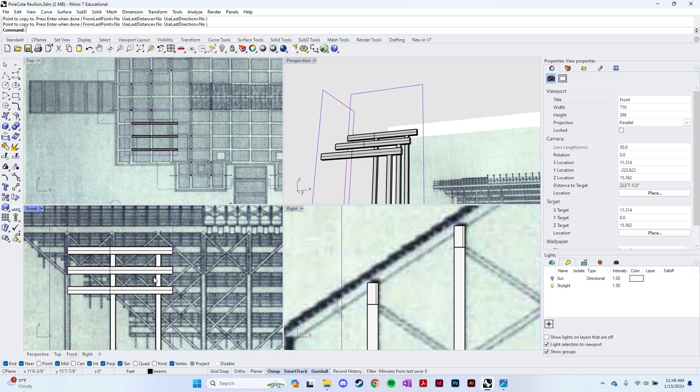Now that we have our beams and columns done, we can start working on the smaller members of our model. One of the members I see is this piece of wood on top of the beams, so we're going to add that in.

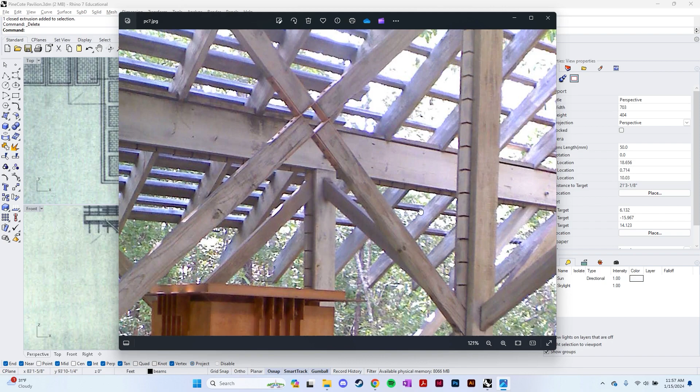Because we don't have any actual measurements, we're going to have to do our best to guess what the member size is. I'll guess that the member size is a nominal 2x8, which would be 7.25 inches by 1.5 inches. After I draw my rectangle on the right view, I'm going to use snapping to grab the midpoint and line it up with the midpoint of the column.

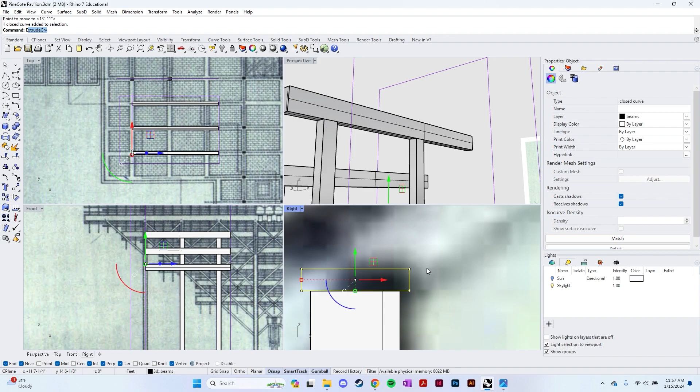Then use the extrude curve command and pull this piece of wood all the way across my beam. We'll take a look at this photo again and see if the sizing looks about right, and it looks okay, so I'm just going to copy this piece of wood to all of the other beams.

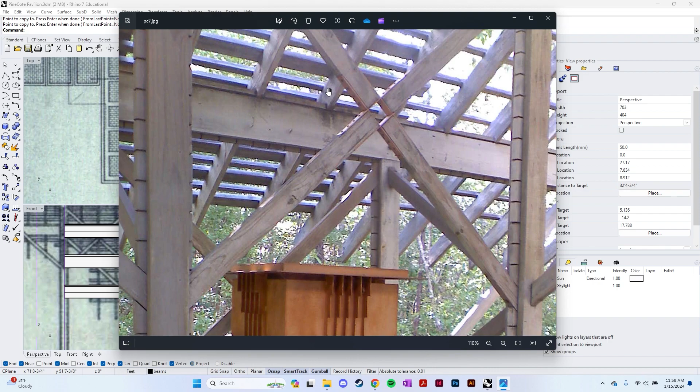Now we can take a look at the rafters. When we zoom into the rafters, we see that they're actually notched, so they're not really sitting exactly on top of the beams, but they're cut so they have a little indent that lets them sit snugly in. When we make our rafters, we're actually going to include that cut.

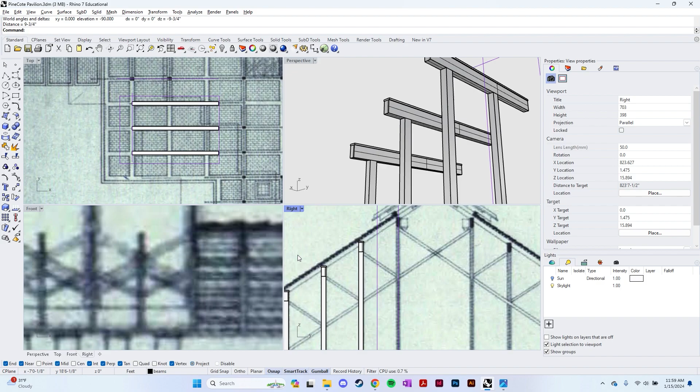So to start, we need to get the dimensions of our rafters, and it's really fuzzy in these drawings, but we'll do our best to make an educated guess. I'm going to guess that the rafters are nominal 2x10, which would be 9.25 inches by 1.5 inches.

Now, because the rafters are at an angle, it might actually be easier for us to construct the rafter somewhere on the ground and then rotate it into place. So I'm just going to draw here in perspective on the C-plane, and then take my rafter curve and extrude it to some arbitrary length up.

Now we can try to rotate this piece. In perspective view, I'm going to grab the piece, and using the gumball, I'm going to try to rotate it - let's say 45 degrees. Maybe that's what it looks like.

And when we do this rotation, we see that 45 degrees isn't really accurate if we look at a right view of our section. So we might need to rotate this piece using commands rather than a gumball.

To start, I'm going to measure the angle between the horizontal ground and the slope of the roof, using the angle command for that. I'm going to start by drawing just a tiny line, and use the bottom piece of the line as my reference point for the angle command.

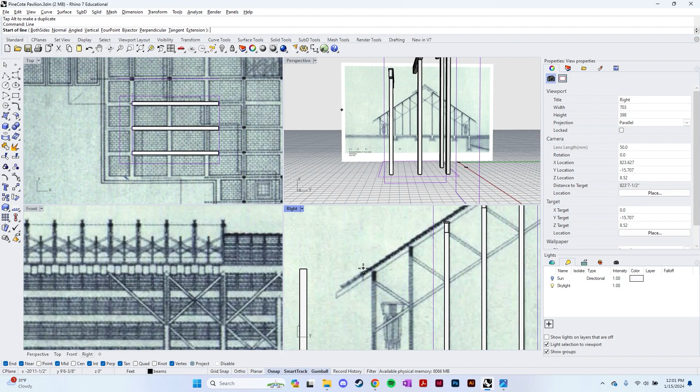The angle command prompts me to draw a line, so I'll draw my first line starting from the bottom of that tiny line, going horizontal, holding shift to snap. Then I'll draw a second line starting from the same place, following the slope of the roof. The command will spit out an angle between the two lines, and I'll use that angle to rotate my rafter accordingly.

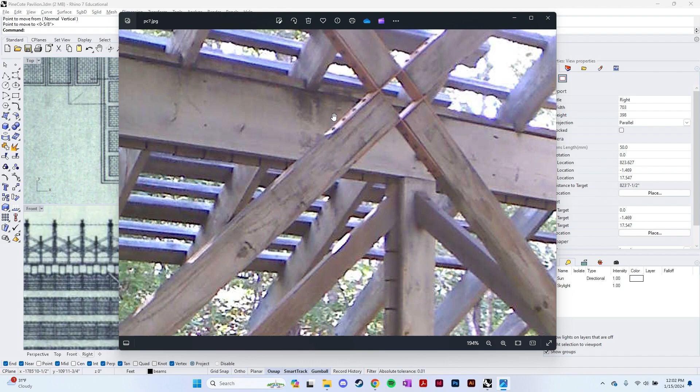Now let's double check how exactly the rafter sits on top of the beam. If we zoom into this image we found, we can see that the bottom of the rafter lines up with the bottom of that piece of wood that sits on top of the beam. So we're going to use our move command to grab the bottom of the rafter and snap it to the bottom of that piece of wood.

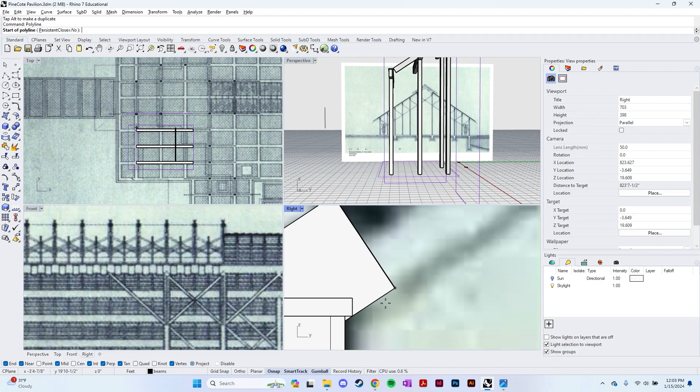Now we have to cut out the piece of the rafter that intersects the piece of wood as well as the beam. To do that, we're going to trace the outline of this piece of wood and the beam. Remember, project is still on here.

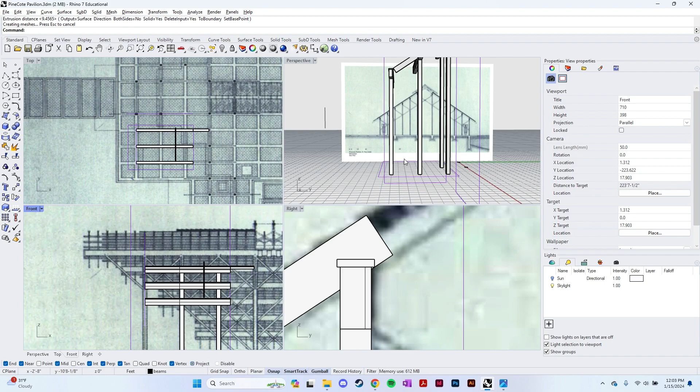So we're going to trace the outline, and then use the command sel last, which will select what we just drew. We'll take our selection and extrude it so we have this kind of trimming gutter here. Then I'm going to use the Boolean trim command like we did before.

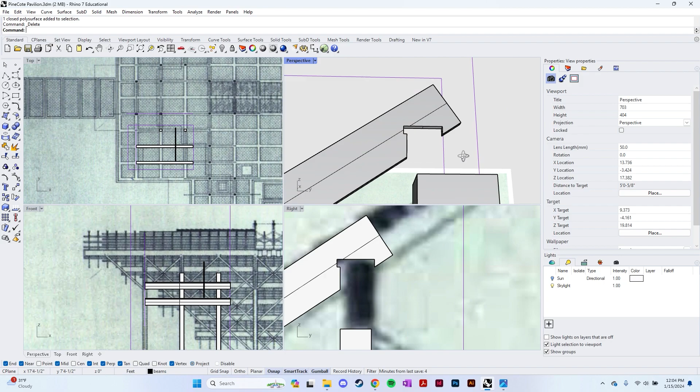After that, I'm going to hide the gutter and the beam as well, so I'm just left with the rafter. We can see that there's this little piece that's not attached, so we click it and delete it. Now we can see that our rafter is formed properly. So we can type show to show everything we just hid, and it looks good.

Now we're going to do the same for the other beams. I'm going to take my trimming gutter and copy it in right view, remember project mode is still on here, to the other beams. We can see that the snapping isn't going to work for this last beam, so we have to copy it from a different reference point.

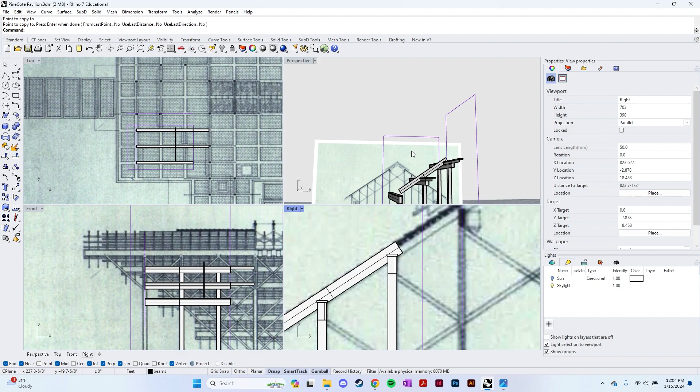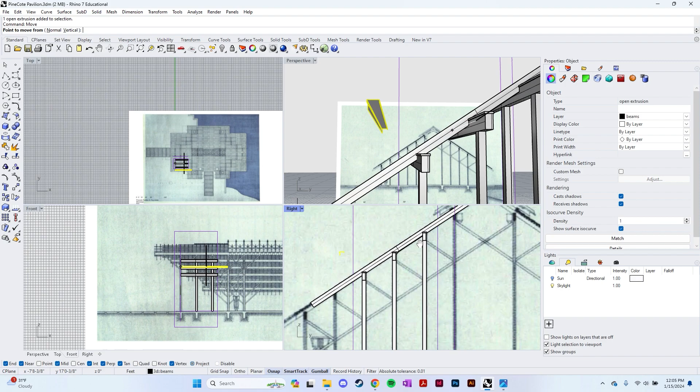Now we can see that the rafter is a little bit too short, so we can use the extrude surface command to pull the surface of the edge of the rafter further out. Then we can merge the coplanar surfaces again, and now we have a rafter that's longer than the appropriate length. So now we can move this trimming gutter in right view again to where it's supposed to go, snapping correctly.

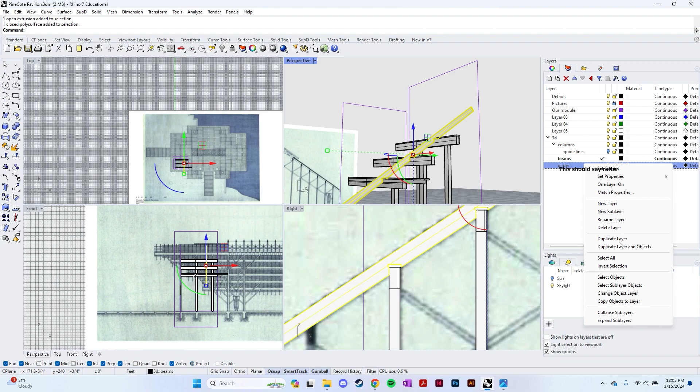I've forgotten to move the rafter to a different layer, so I'm going to make a new layer. And if I want to save this gutter piece that I'm using to form my rafters, I can create a new sublayer and stick it under that, changing the layers of the objects. Now if I hide the beams and columns, we can see that this rafter is looking real nice. We can also take a look in our right view to make sure everything's checking out. So let's go ahead and show everything again in our layers panel.

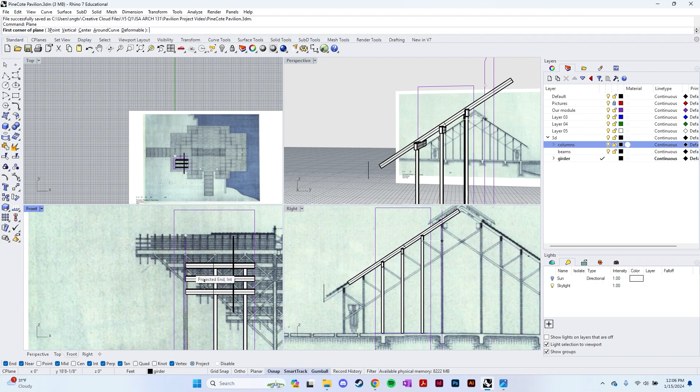If we want to trim our girders, we can do them the same way we did the beams before. We can use Planar Surf to make surfaces out of these curves we've created as our bounding box, and we can use the Boolean split command to use these planes as trimming planes.

Now that we have our girder trimmed to size, we can copy paste it to every single spot it needs to go. If we take a look at this long section here, we can see there are actually tons of rafters that we need to copy paste. So let's get the distance between them all. Using the distance command, we're going to grab the distance between two rafters, and it looks like 1.5 feet, which seems pretty reasonable.

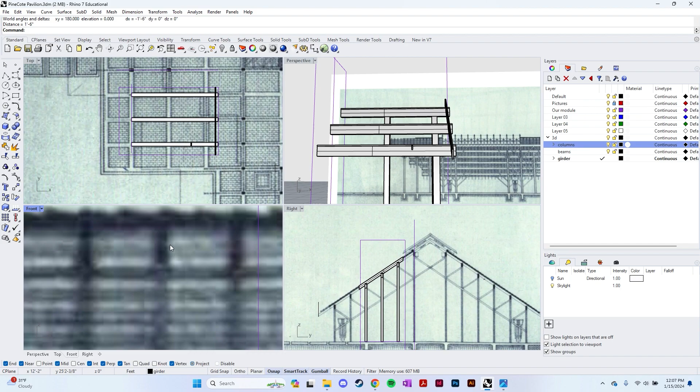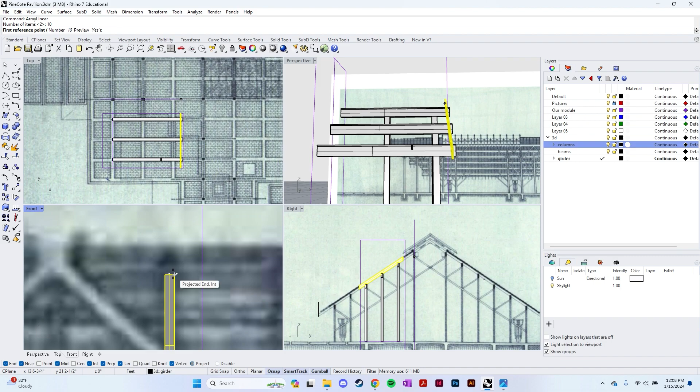Instead of copying and pasting this rafter multiple times, we're going to use a different set of commands. When we want to create arrays of things, we can use the array sets of commands. I'm going to use array linear because I'm creating a linear array of the same element repeating multiple times. It will prompt me for what it wants, first asking for the number I want - I'm just going to guess maybe 10. Then it's going to ask for a reference point, so I'll make sure Project is still on, type 1.5 feet, hold shift to snap to 90 degrees and click, and it will form all of my rafters.

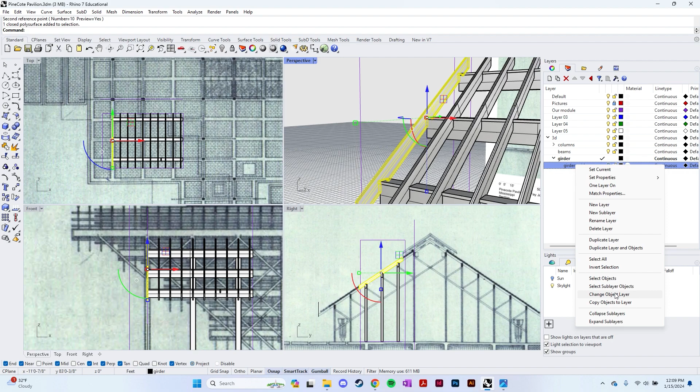Here we can take a look in perspective to see that all of the rafters appear there. This last one's kind of hanging off, so we can just hide that away by changing it to the sublayer that we created. Don't forget to save your work.

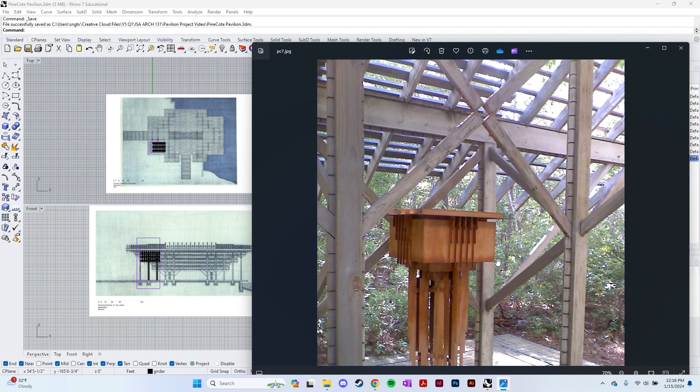Now it's time to work on the bracing, or the diagonal elements of this building. Because the plans and sections aren't very clear, we're going to have to cross-reference those with images we find online. This image is pretty good, it shows a lot of the connections, and this image as well will be very helpful to us. So we'll cross-reference these and make sure everything lines up when we draw them with our plans and sections.

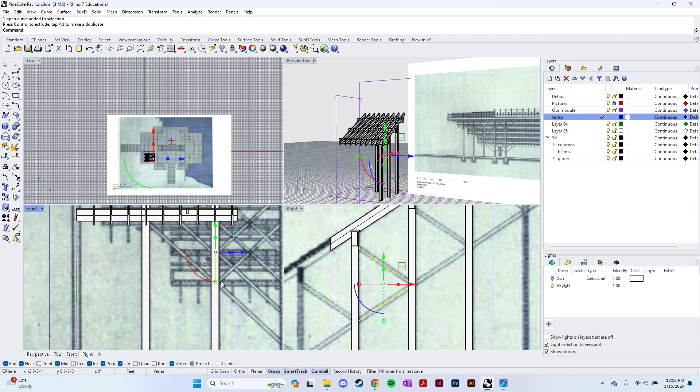My first step would be to figure out where everything goes. To do this, I'm going to create a temporary layer and sort of sketch in Rhino where I think these elements will go. In the short section, we can see this V shape appearing, so I'm going to draw that, then go into perspective as well as the plan view and line up this V with the column lines.

Now when we move around in perspective, we can see that we've correctly drawn this V. Now because of the way our columns are laid out, the V underneath this beam is only going to appear here.

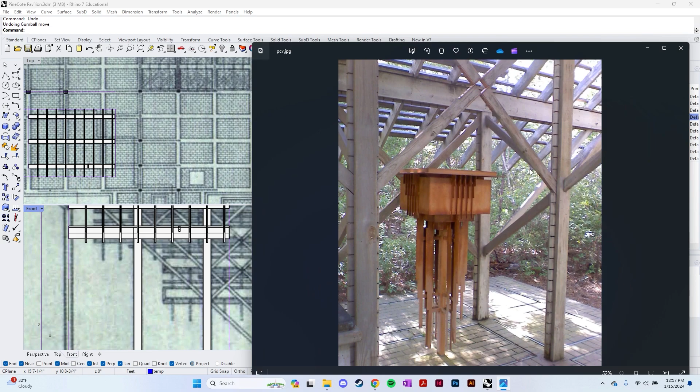So now we can rotate our view 90 degrees and take a look at the long section to see which elements we'll be drawing, and we can see the same sort of V pattern appearing here. In the long section it's a little bit less clear, but we can start slow and just make sure that we're drawing what actually exists.

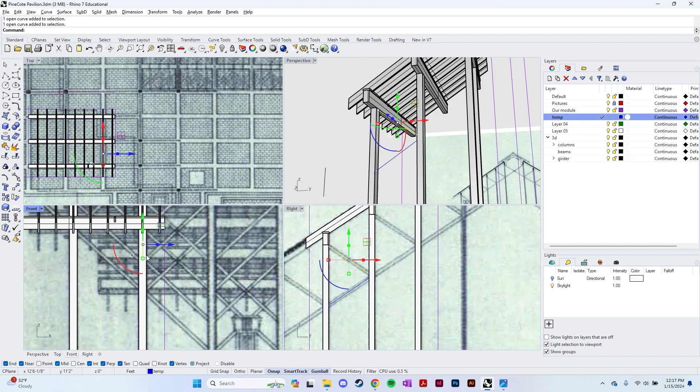Based on the previous image as well as this long section, we can understand that these brace pieces run from column to column. Vertically, they go up about 2 beam spaces. We can also see by looking at this image that there's a connection point in the middle, so we have to make sure that we account for that.

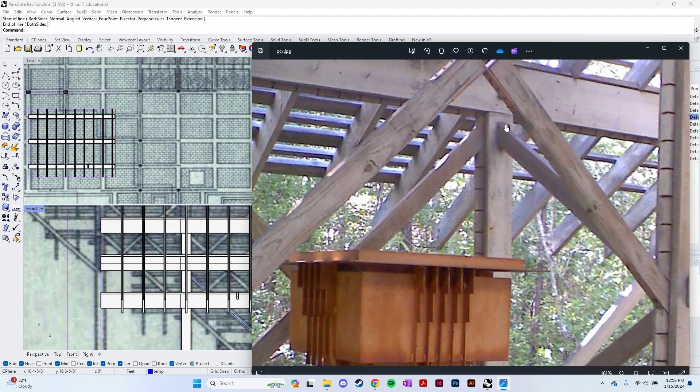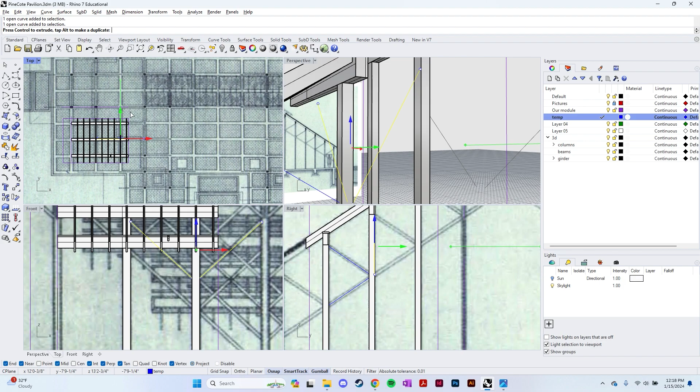We can start by drawing this one diagonal bracing that's running parallel to the long section, and then because these bracings in the long section are symmetric across every single column, we can draw the bracing that's going the other way as well. Now when we're looking at what we just drew in perspective, we can see that these bracings don't really line up with anything, so we have to adjust for that by looking at both the plan and the short section, and we can scoot this V to sit underneath the beam and on the column.

Now because these bracings are very much repeated for the most part along every single column, I know that after I draw the members I can just copy them over, and because all of the bay spacings are the same, the bracings will fit between every single column perfectly.

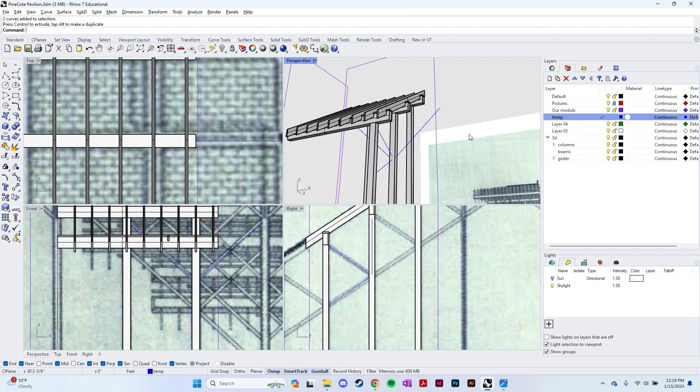Now again, because these pieces are getting smaller and smaller, our dimensioning will be less and less accurate, so we're really going to have to guess. Based on the images, it looks like this is about a 2x4 piece of lumber, which is a very standard piece.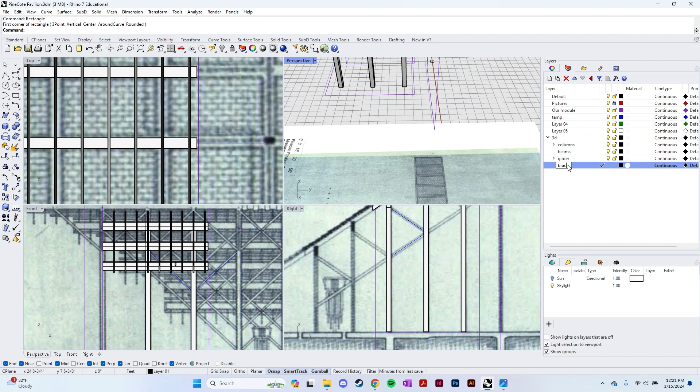I'm going to create a new layer for bracing. I'm just going to draw out a rectangle that's 3.5 inches by 1.5 inches, and this process is going to be very similar to the way we did the rafters, by extruding and then rotating to match the angle that we desire.

In perspective, plans, and sections, we can line up this bracing such that it matches and fits in exactly where we want it to be.

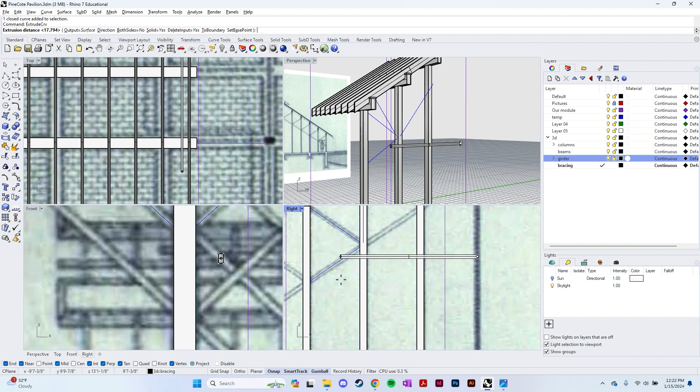Now we want to make sure that these bracings are perfectly centered. We can see here in plan that this bracing isn't actually exactly where it's supposed to be. So what we're going to do is use the move command, and with snapping turned on, grab the middle of our bracing piece and find a point where we can snap to the middle of. In this case, I'm going to snap to the middle of my column.

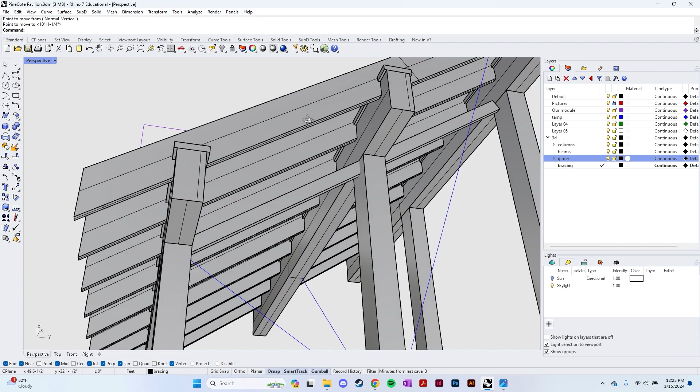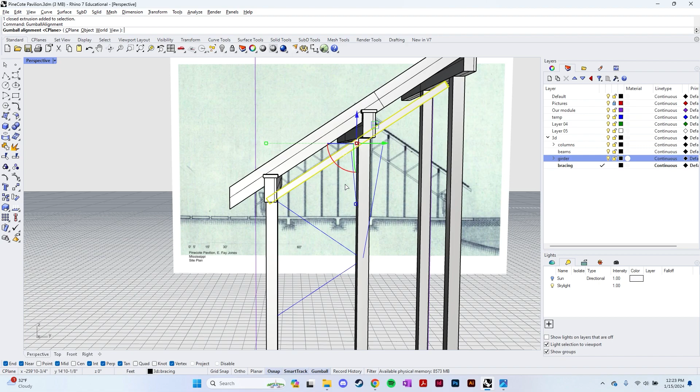Now, because this piece is slanted, when we use the gumball, we can see that it doesn't actually line up with the piece. So if we wanted to slide the piece back and forth along its own axis, this wouldn't be possible. In order to fix this, we're going to change what the gumball is referenced to. So if we type gumball alignment, we can align the gumball to the object itself rather than the default C-plane. Now we can see the gumball has changed, and we can slide it back and forth such that it fits in between our two columns.

Now we can change the gumball back to C-plane and slide the bracing down to where it matches on the short section. And then I'm just going to extrude this bracing out.

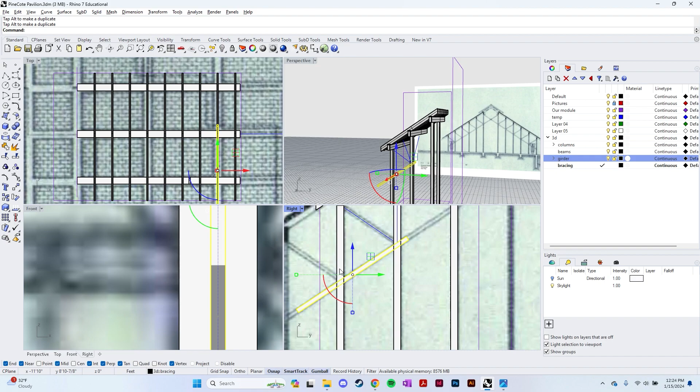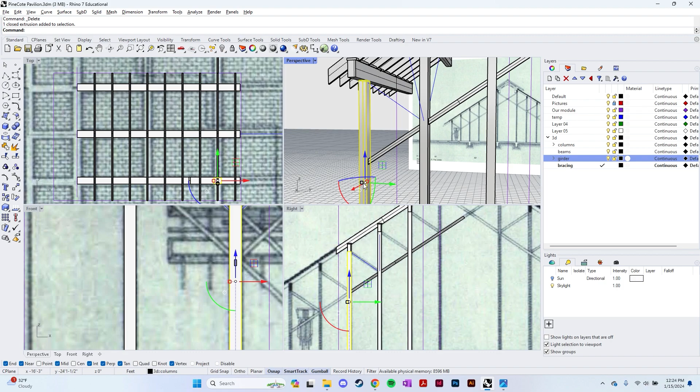Now we could either make this bracing an individual piece, or because it looks like this element of bracing is linear throughout multiple bays, we can actually chop it all up at the same time. To do this, we're going to use the Boolean split command just like we've been doing before, by selecting multiple columns. Just be aware that when splitting with objects as opposed to planes, the Boolean split splits along the planes that comprise the objects.

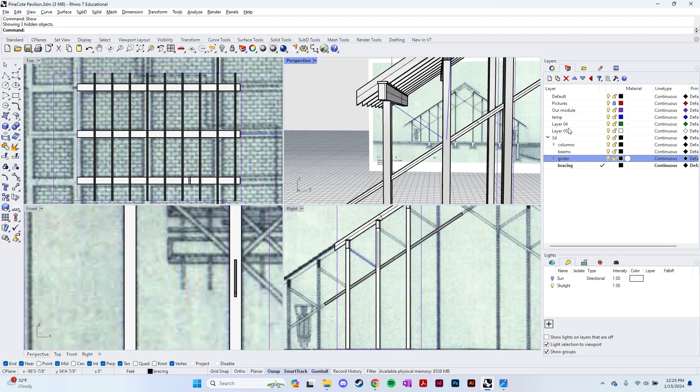So we actually have to hide the objects that we've used to split, and then delete the insides of the object that we were splitting. Then just type show to bring everything back. And if you're selecting multiple objects and make a mistake, you can always use Control to deselect the object that you clicked by mistake.

We can now copy the bracings over to the other columns where they need to be. We can see that only this bracing would be copied over, because there are no other columns that the other pieces of bracing would attach to.

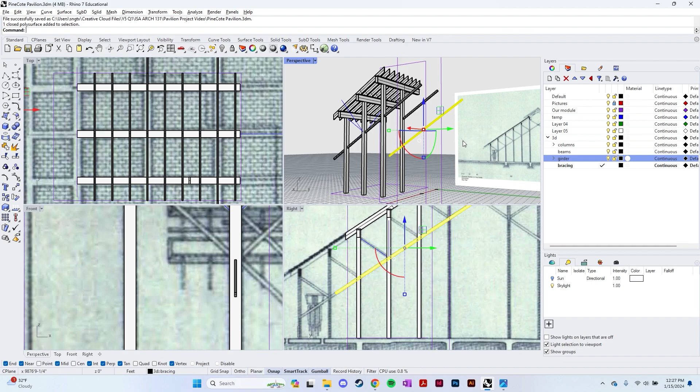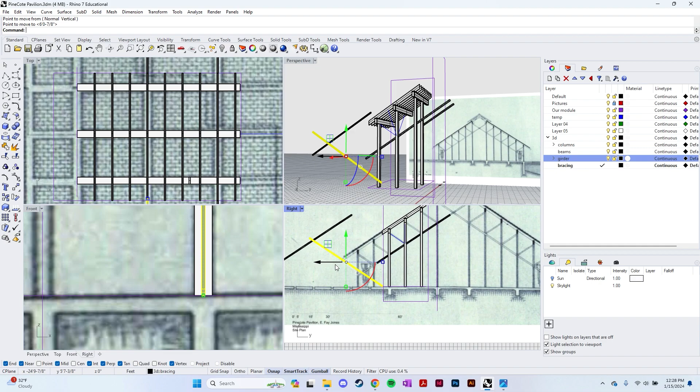Now, in order to complete this V shape in the short section, we can take a copy of this bracing and rotate it around so that it's a mirror angle of the initial bracing we had. Then we line the bracing up by snapping in the long section and using the gumball to move it in the short section. Once it's lined up, we use the Boolean trim command like before.

Once we have this piece of bracing, we can take it and, using a common reference point, copy it to the other columns where the bracing exists in the building.

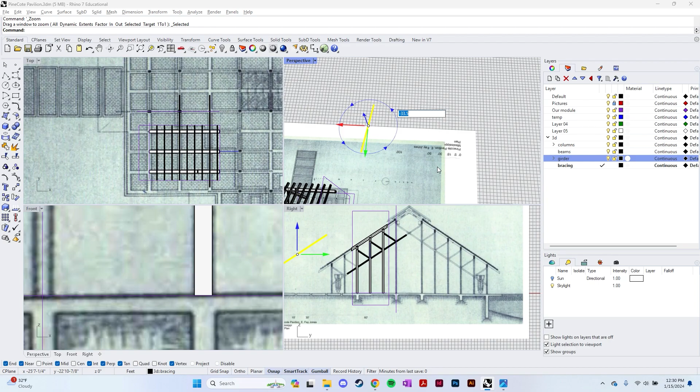We can now start working with braces in the long section by taking a bracing in the short section and, in top or perspective view, rotating it 90 degrees. Then in a similar process, we need to match the angle of this piece of bracing.

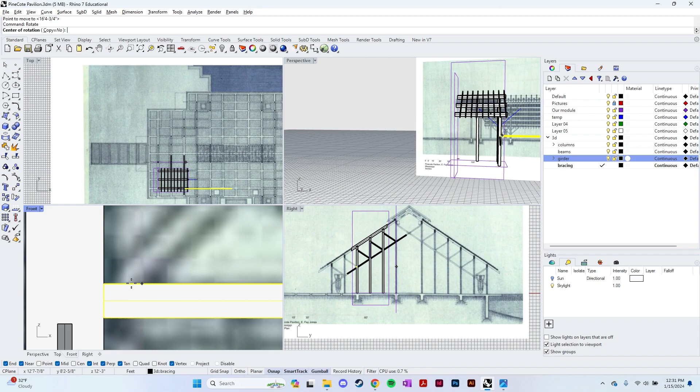We take the bracing and move it so that one end is lined up with where the bracing would be if it were angled, and then use the rotate command to rotate the bracing so it matches the drawings.

Once we do this, we can again use the move command to snap the bracing to the center of the column and line everything up. Once our piece of bracing is at the correct angle, we again use Boolean trim and copy paste this piece of bracing wherever applicable.

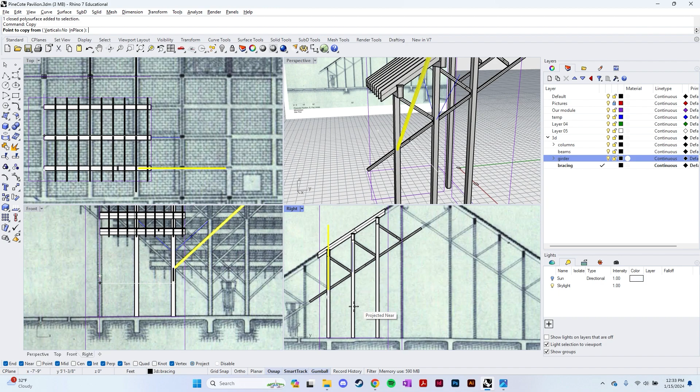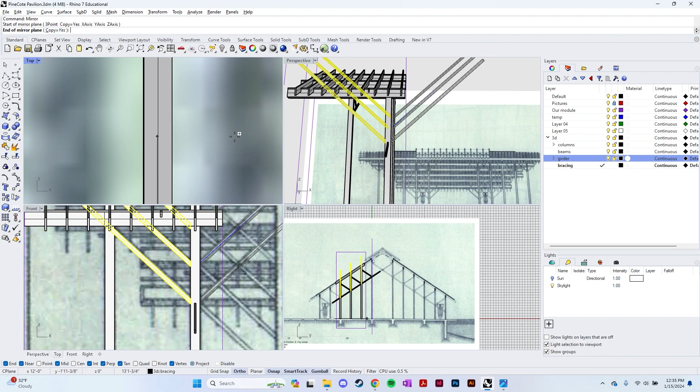Now these bracings are symmetric across these columns, so we can take them and swing them over to the other side using the mirror command. We select the objects we want to mirror, go into plan view, and draw a mirror plane, which makes all of the selected objects symmetric across that line.

Then we can go ahead and Boolean trim the excess away. Now there's one detail where these two bracings cross, and in photos we can see there isn't actually a piece in the middle, but instead metal plates that connect everything together. So we're going to model that very simply.

To do this, we're just going to draw boxes where the metal plates are. We turn project off and use the box command. Because boxes typically snap to the C plane, we're going to use the 3-point setting in the box command to align our box with our own points.

Now, when we want to manipulate settings in Rhino, we don't have to click them, we can just start typing the name of the setting and press enter, and it will automatically open. So if I type 3 into the command line and press enter, the 3-point setting is applied, and I can use it on the box command to draw out my box. I'm going to assume the plate is 1/8 inch thick.

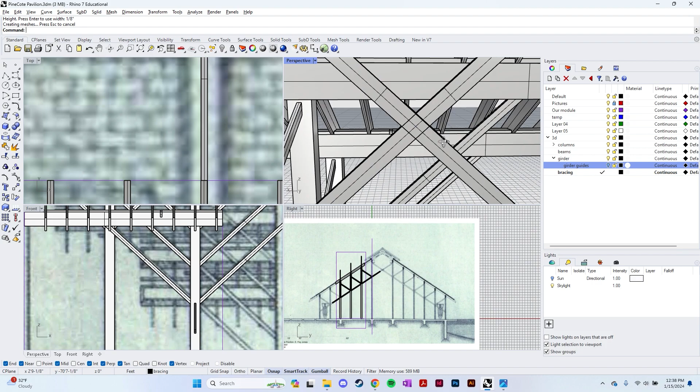Now when I check back on the image, it looks like my 1/8 inch plate might be a little thin, so I can extrude the surface if I need to.

In order to get rid of the center piece between these two bracings, I'm going to use Boolean split, but using both objects as the cutting objects and both objects as the objects being cut. Then I can just delete the centers.

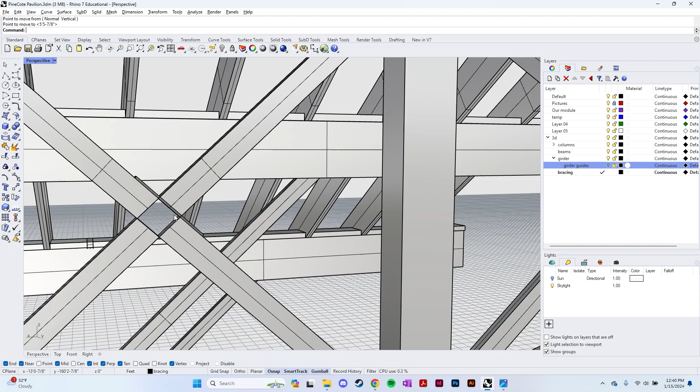Now I can take this plate and, using snapping, move it from the plate's center to the bracing column center. Then I can copy it from center to center, creating a copy of this plate.

Move the edge of the plate to the edge of the bracing, and then, going into front view, rotate the plate so that it lines up with the bracing.

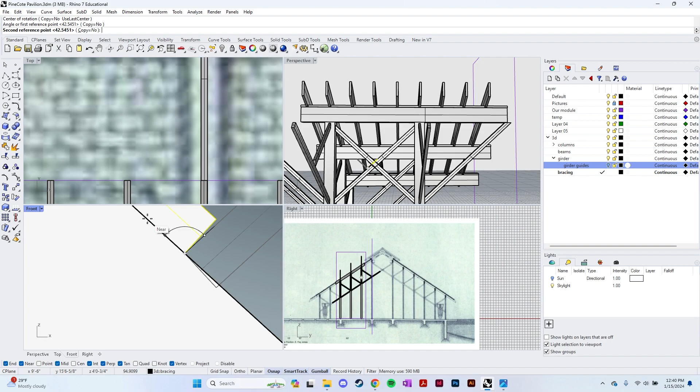Then all I have to do is take that plate I just rotated and center it by moving it, snapping the center of the plate to the center of the column, and then copy this again to the other piece of bracing on the bottom right.

Then I'm going to join all of these plates together using the command Boolean union, and this will create one solid object from multiple intersecting objects.

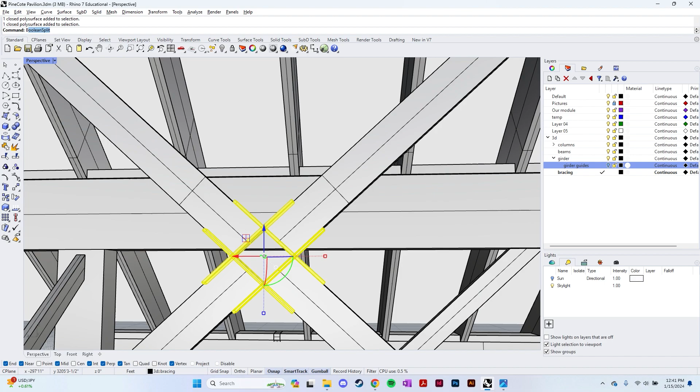Again, we're going to use merge coplanar surfaces here and then trim away the excess bracing that overlaps with this new set of welded plates that we've just created. You could then also try to make the bolts, but I'm not going to bother.

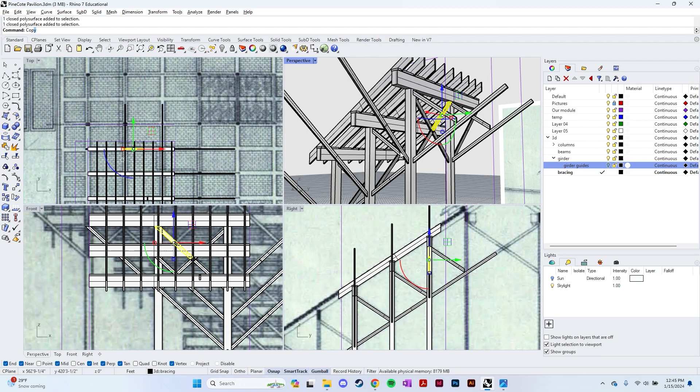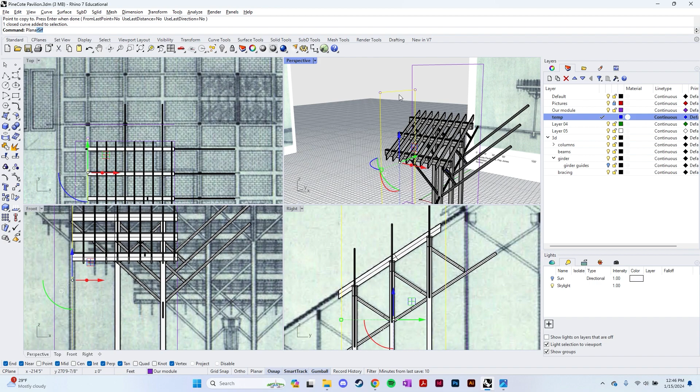Now all we have to do is double check all of the images and the plans and sections and make sure that we're not missing any pieces. So it seems that I forgot one or two pieces here, so I'm just going to take the existing pieces, and because all of these columns are regular and have the same set of bracings, I can copy it over. I can also see that I forgot to trim these pieces correctly, so I'm going to go ahead and do that.

Now that I have all my geometry set up, I'm going to trim everything down to this initial bounding box that I set up at the very beginning. So I'm just going to create planes on all 4 sides, and then Boolean split everything against all 4 of those planes, trimming away all the excess that's sticking out. And we're left with something that looks a little bit like this.

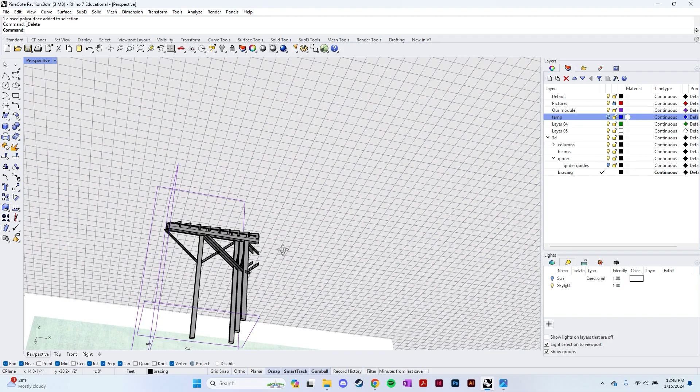Now we can begin to model the roof. So underneath the shingles are these long wooden pieces called battens. First, in order to model them, I'm going to make sure that I turn project on, and I'm going to create a new layer called battens.

Then I'm going to go into right view and draw rectangles that correspond to the sections of these battens, using the rectangle tool and typing 3 to make it a 3-point rectangle so I can line it up with the angle that the rafters are on. Based on the images, it looks like the smaller pieces are maybe 2 inches by 2 inches, and the bigger ones are 2 inches by 4 inches nominally.

So I've just created a copy of the 2 inch by 2 inch rectangle, and because I know the 2 inch by 4 inch rectangle is twice the length, I'm going to click this little red square in the Gumball tool, which is like a scale tool. When I click it, I give a scale factor, in this case 2, because it's twice as long in the red axis. When I type 2 and hit enter, it will scale my selection to 2 times its length.

So I'm just going to draw them out and then change the gumball such that it lines up with the object, and then do my best guess to see what the spacing looks like.

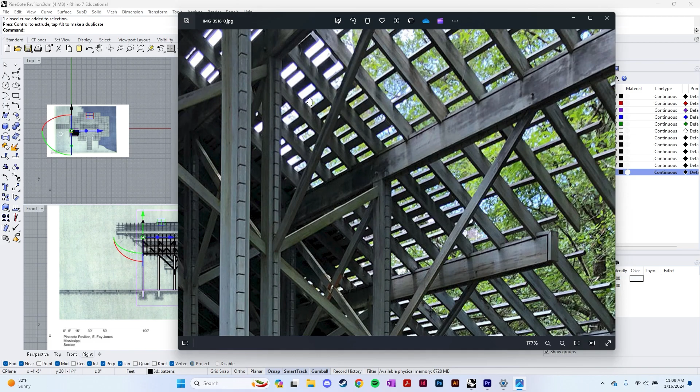According to these images, it looks like there are 6 sets of small and then big battens. So I'm going to use the array linear command, type that I want 6 objects, select the reference point, and then make the array. Here, I don't really know the spacing between them, so I'm just making my best guess such that all 6 pieces kind of equally take up the spacing between these columns.

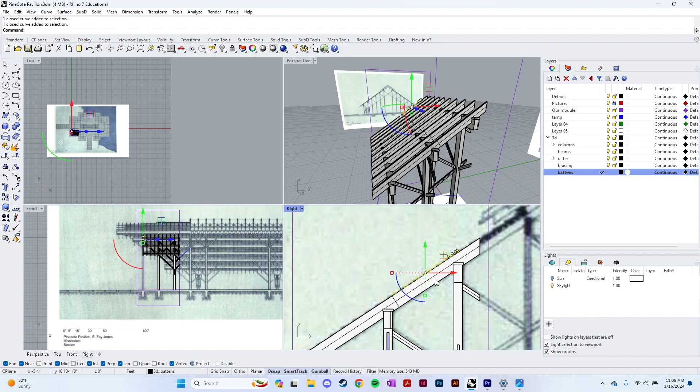Then I'll use the select last command to select the array I just created, and holding shift, add the first 2 rectangles to my selection. Then I'm going to use the copy tool, and by selecting a repeatable frame of reference like the top of these columns, I'm going to copy the battens across all the spans, as well as above and below.

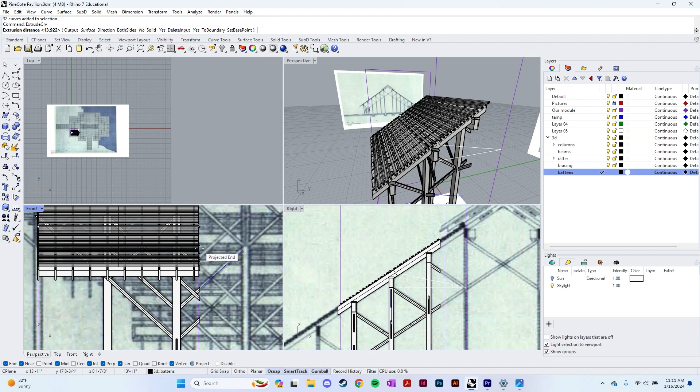Then all I have to do is delete the rectangles that don't fall on the rafters. Then I can select all the battens by right-clicking the batten layer and selecting all the objects within the layer, and then using the extrude command, extrude all of them in the long section view to make them stretch across the length of the module that I'm working in.

Now, when we look at the actual images of this pavilion, we can see that not all of the battens go all the way across. So within this image, I'm going to take a look at where my section is, find that on the ground, and then move my way up the column to figure out where the roof lines up. Based on this, I can see that the thicker battens end somewhere halfway in between this rightmost span between these two columns.

And I can see that the thick battens also continue after about a few spaces in the upper span between the two columns. So I'm going to make a plane that I'll use to cut these, and use Boolean split to split the battens that I think should be split. You can kind of see, based on my selection as well as the short plan, which battens do not extend all the way across and which do.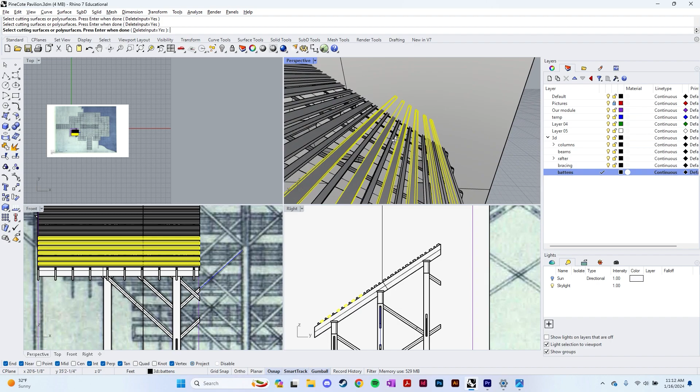Once they're split, all I have to do is go back and delete the ones that don't exist in real life. After doing this, the only thing left is the little bit of shingles in the top right. I'm not going to model every single shingle individually, but I will create a representation of where the shingles will be in the model.

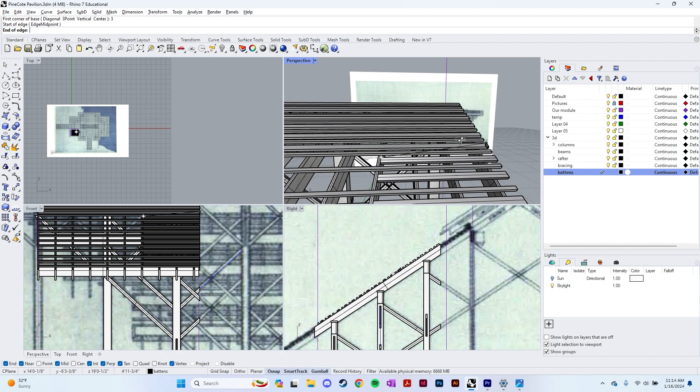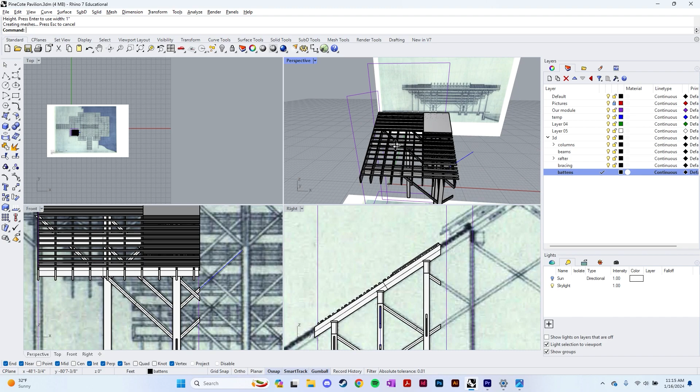To do that, I'll just create a simple box where I think the shingles will be. With my snapping, I'm going to turn project off, then create a box using 3-point where I think the shingles appear. I believe the shingles are probably about an inch thick, so I'll type 1 to give it that thickness. This is what we end up with for our roofing. If you want, you can always just draw shingles in on top of this box.

Now we're going to model the ground. To start, I'm going to create a new layer called ground and make sure I stick it under 3D. I'm going to create the slab that sits on top of the footing.

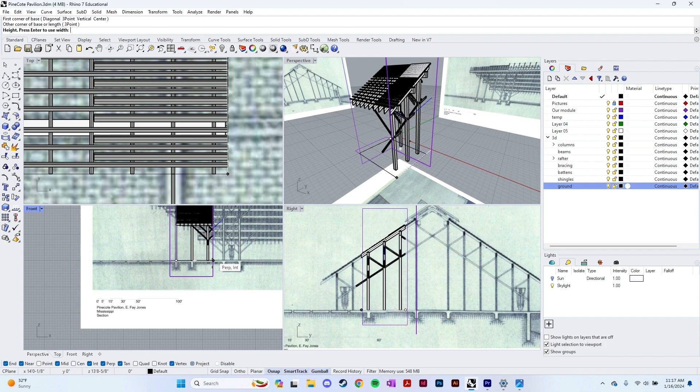To do this, I'm going to make a box, go into top view, and start by tracing the outline of our working area in top view. Then I'm going to come into our front view and pull the box down the depth of this slab piece. Then I'm going to draw our footings much in the same way we did our beams.

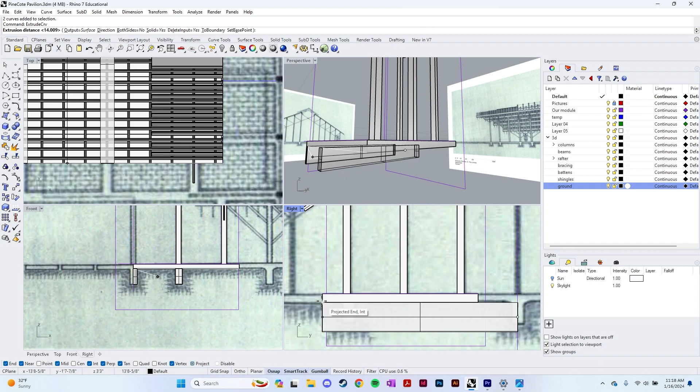This is all very approximate because we don't have any image reference of what's under the ground, so we're just going to rely on what our plans and sections show. We're just going to go ahead and trace these footings and extrude them in the section that runs across.

Once we have our slab and footing, we're going to select everything and Boolean union everything together so it's one big piece. Now, because I drew these footings a little bit too far, I'm going to unhide my temporary layer that has the surfaces and just use those to Boolean split my footings.

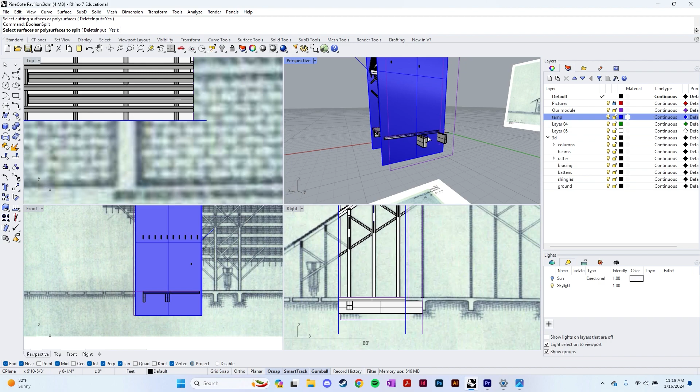Just like the shingles, we can see in this image that there are actually brick patterns here. I'm not going to model every single brick, but if you wanted to, you could always just draw the outlines of the bricks on the slab.

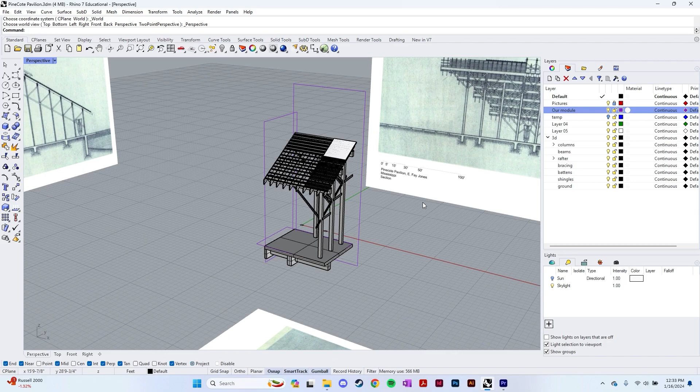So our 3D modeling is basically done. But if we want to take this 3D model and make it a 2D drawing, there are a few things we can do. First, we can turn off everything that we don't need, so the pictures and all of our other markings. Then I'll create a new layer called 2D.

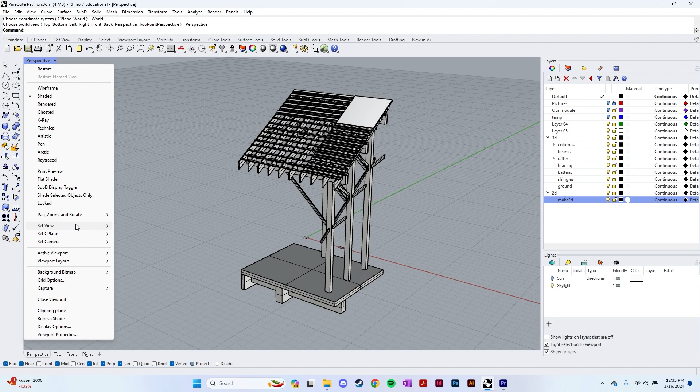Then I'm going to click the drop down again, go to set view, then isometric, and choose any one of these options. This will make the view parallel, and parallel views are what allow us to convert our 3D models into orthographic drawings in Rhino. Once you find the view that you like, you can also orbit it around if you find a view you prefer. We're going to use the command make 2D.

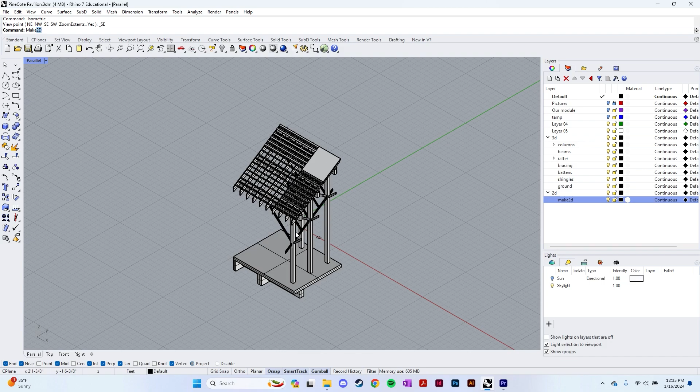Once we run the command make 2D, we're going to select our object that we want to draw, and now we're going to take a look at these settings. First, make sure that your view is set to parallel, and in your projection, make sure it's set to view. Then under object properties, I'm going to select that the properties are going to be derived from their input layers, and then I'm going to uncheck every single box.

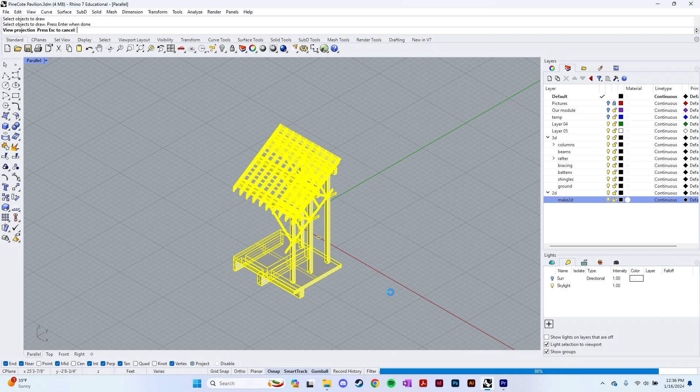You can play around with these settings if you like. Sometimes some settings are better for certain scenarios, but for now I'm just going to turn everything off. Now, when we run make 2D, we can see that the output gets put on the C plane.

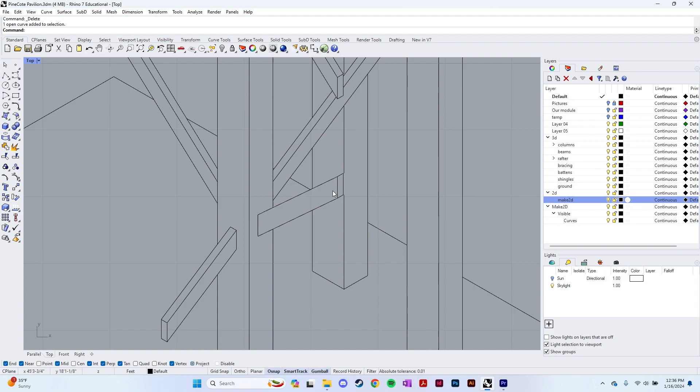Now we're going to switch over to top view and take a look at what we got. It looks pretty good, but when we zoom in, we can see that there are some errors in certain places. At this step, what we would do is clean up all of these sort of errors that we find here.

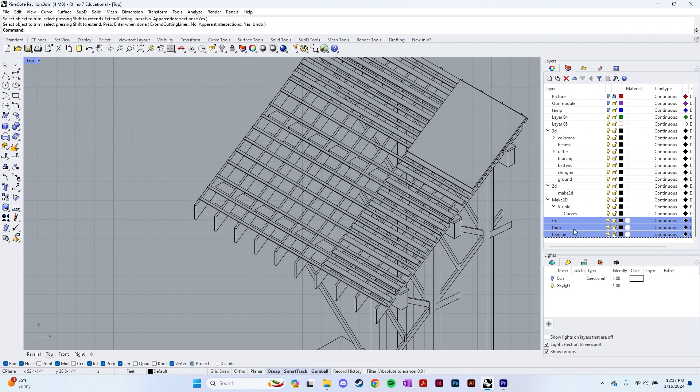After cleaning up the errors, we can create layers that represent our different line weights and thicknesses, and start transferring the different lines to their corresponding line thicknesses. Once we have all of our thicknesses set, all we have to do is use the print command, and we can print our 3D models as 2D representations on paper.